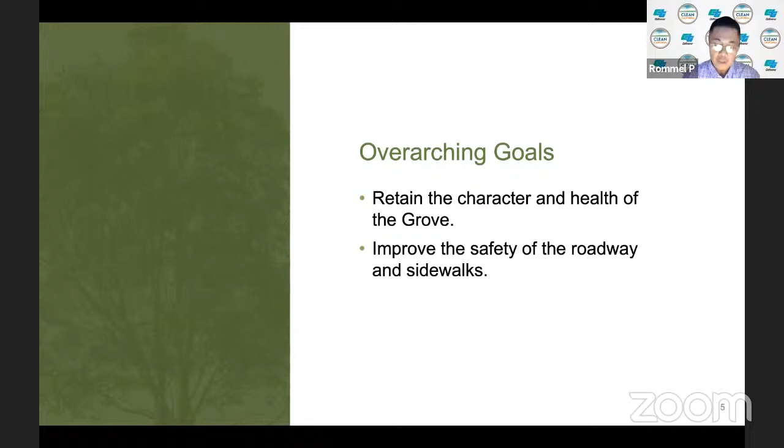Next slide. We've been working hard to achieve solutions that meet your overarching goals of retaining the character of El Camino and improving the safety of this important roadway and its sidewalks.

Next slide. This slide shows our 3-mile project area limits and a bulleted list of the main items we're working on to improve. I will now share a few details about each of the 5 scoping items. Next slide.

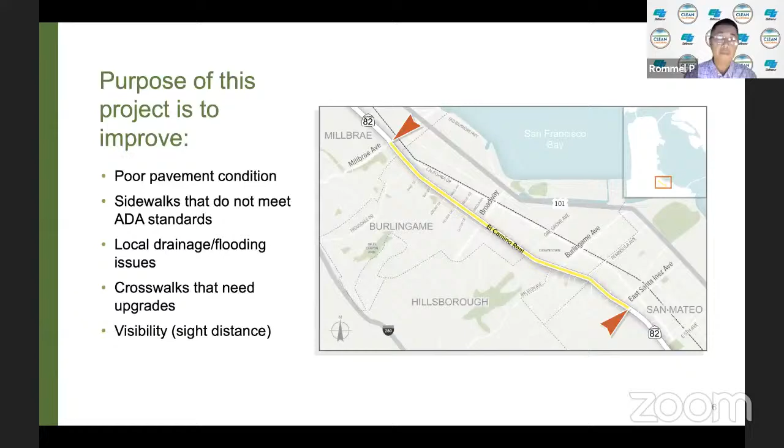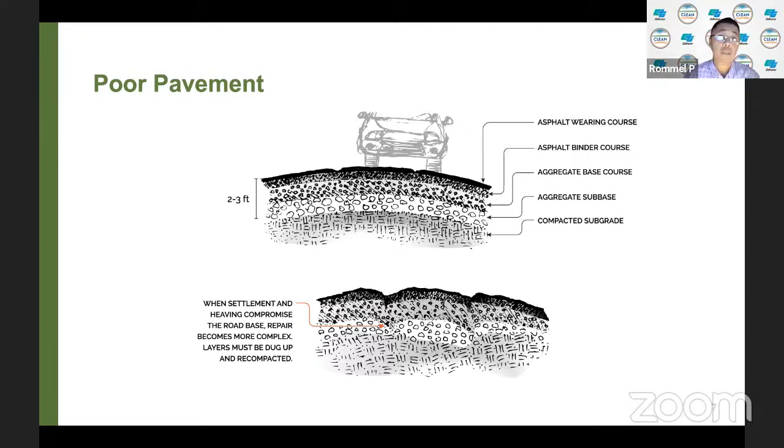El Camino Real has significant settlement, cracking and heaving of asphalt. The damage is so extensive that the road base has been compromised and surface patching is no longer an option, as you can see in this slide.

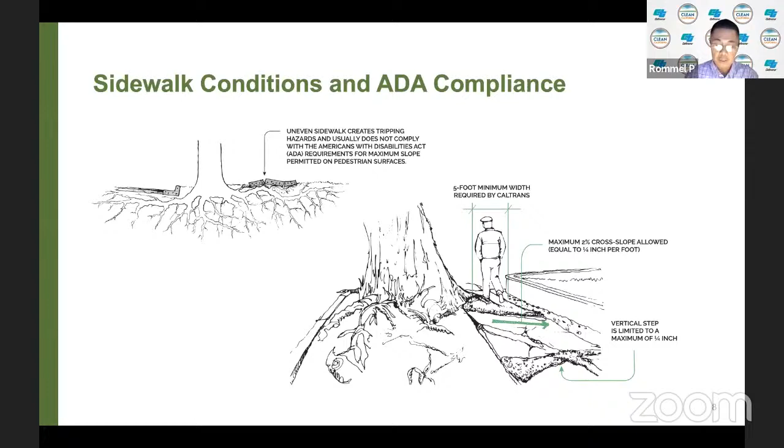There are several ADA issues present on the sidewalks: lack of appropriate widths, cracking of concrete that creates uneven surfaces, and cross-sloping issues. All of these will be addressed with this project.

Next slide. A new modern drainage system is also needed for ECR. There are several issues shown here that are a result of old drainage infrastructure.

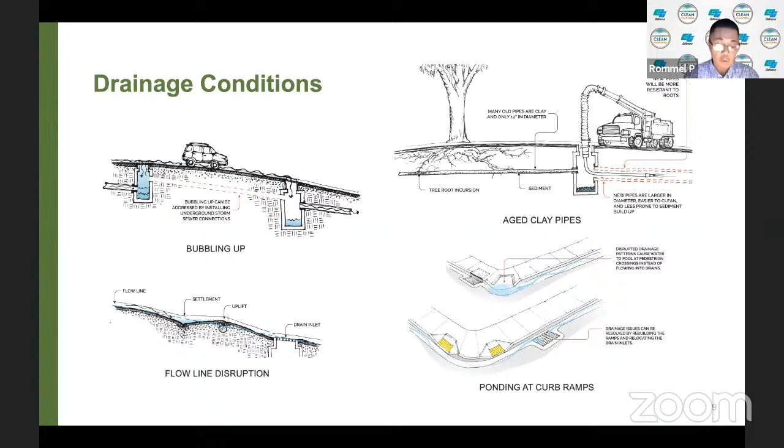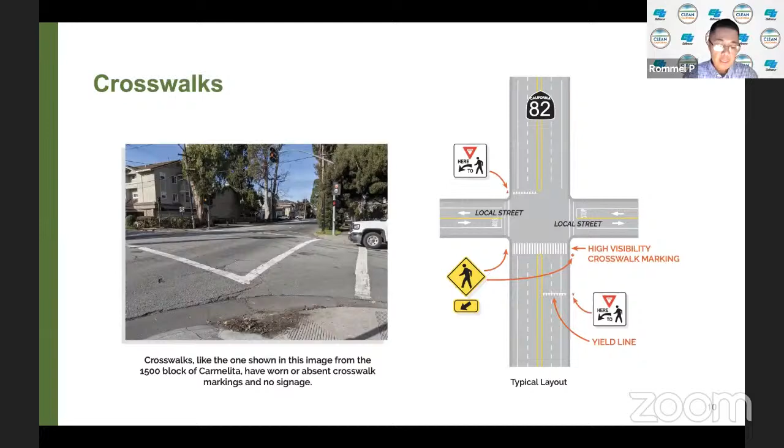Next slide. A total of 16 intersections in the project area need pedestrian crossing improvements. We'll place highly visible pavement markings and install proper yield signs at these intersections.

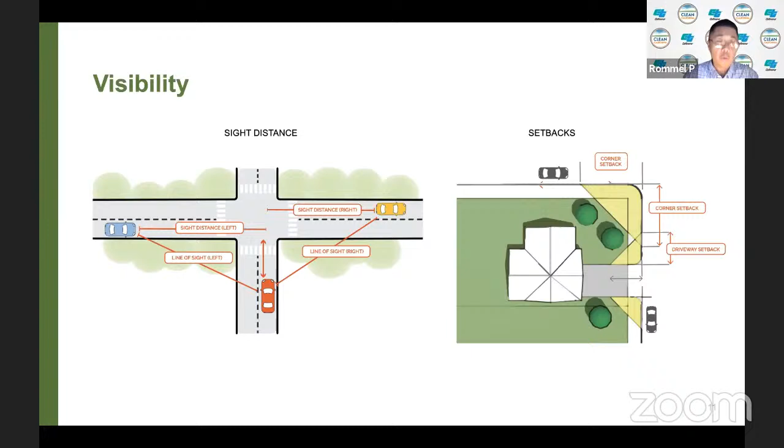Thank you, Rommel. Once again, my name is Marc Wong, and I'm the Caltrans Design Senior on this project. As Rommel mentioned, we've been busy over the last several months putting our research on paper. All of our Caltrans departments are underway on design work, and that includes electrical, environmental engineering, corridor management, hydraulics, landscape architecture, materials, right-of-way, traffic signing, and utilities.

A few things to highlight. We've completed LiDAR mapping and photogrammetry of the project location, which, to those who are unfamiliar, is using sophisticated technology to accurately map the ground, as well as aerial photography to give us a pictorial representation of the roadway. Survey alignments have been generated. Tree locations and types have all been inventoried. Sidewalk and planter layout is underway, and coordination with PG&E is ongoing.

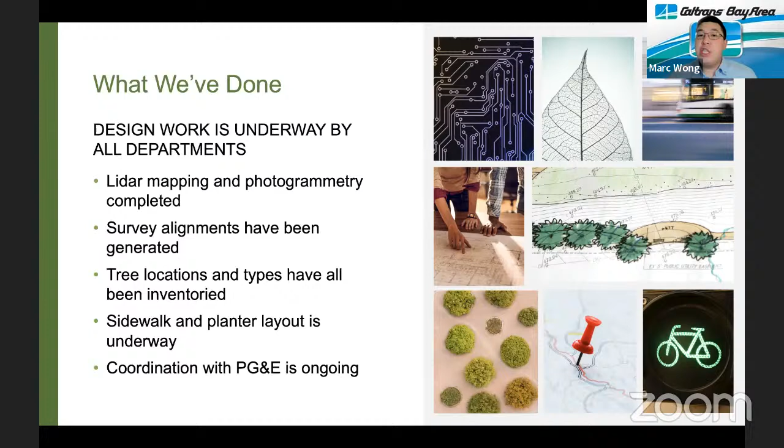By this April, we plan to complete our 65% design package, which will include the plans, project specifications, and the engineer's estimate, also known as PS&E. We'll determine sidewalks, crosswalks, and planter layout, identify trees to be removed, identify properties that will need temporary construction easements to rebuild driveways and retaining walls.

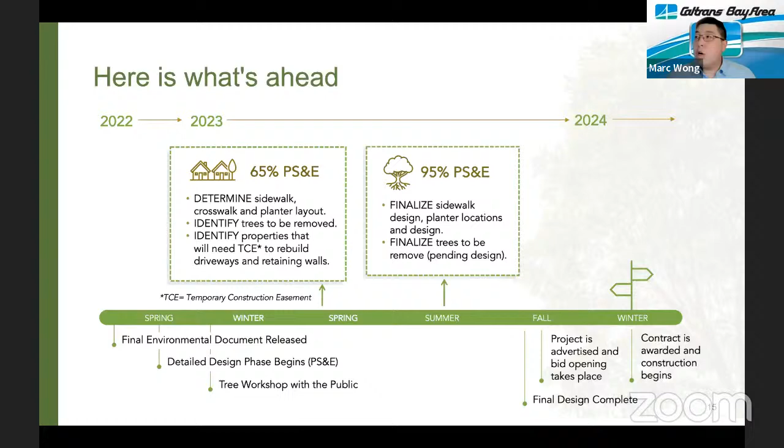And by next summer, we should have our 95% package complete. Our 95% package will finalize sidewalk design, planter design and locations, and finalize the trees to be removed. Following 95%, our completed design package is expected to be complete by early fall, followed by project advertisement shortly thereafter, and awarding the contract to a contractor in early 2024.

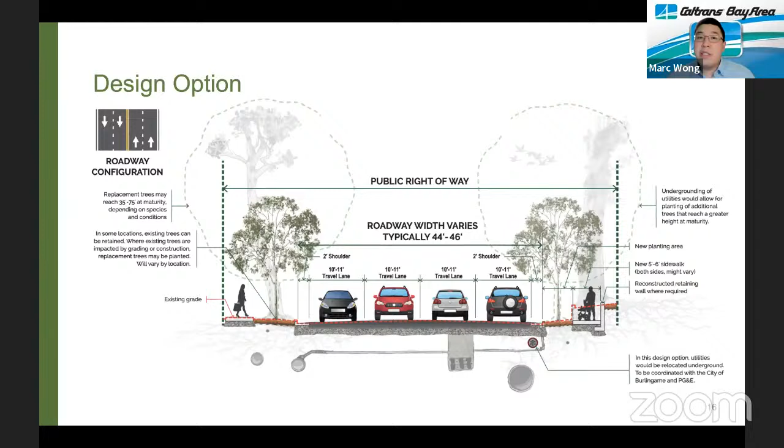And now I'd like to hand the presentation over to Kimberly White from our landscape design team to go through some visual simulations. Kimberly? Thanks, Marc. Good evening, everybody. I'm Kimberly White, the senior landscape architect for this project.

I'm going to first review the simulations we prepared for the visual impact assessment and environmental document. We selected 3 locations that represent both the variability of the project corridor and the areas where we anticipate more substantial impacts. These locations included Hillside Drive, Forest View Avenue, and Carol Avenue.

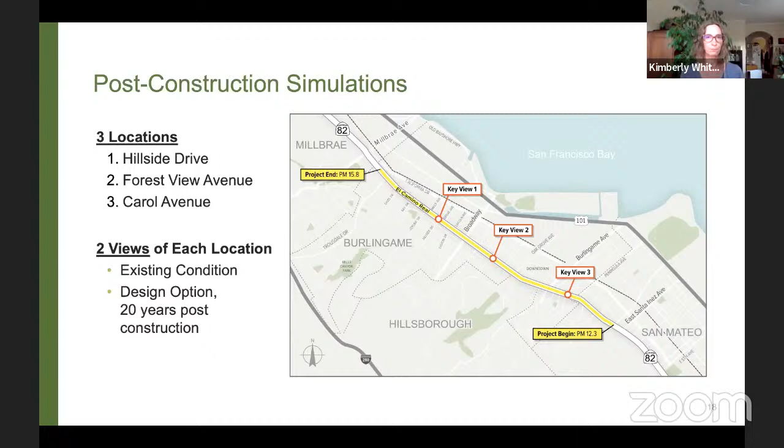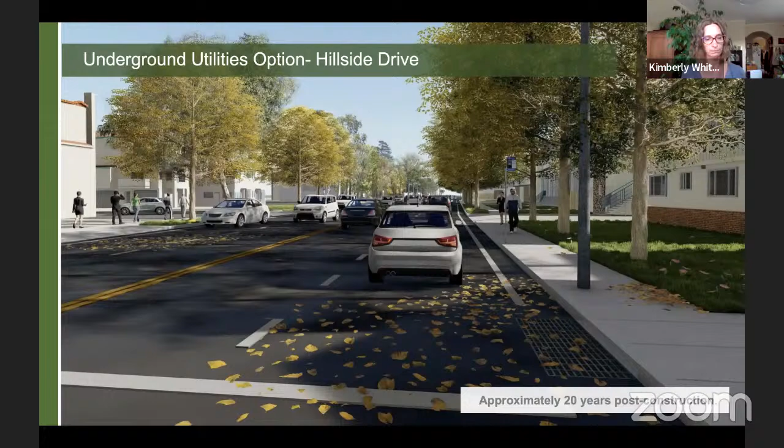So if we look closer down the block, you see the sidewalk is shifted with the trees and planter strip between the pedestrians and street. I will explain more about the reasons for jogging the sidewalk later, but briefly, this is an approach we are carrying forward to maximize the number of street trees we can plant while preserving clear visibility and safety for all users on El Camino at the intersections.

Maximizing tree canopy, ensuring safety, and locating trees between sidewalks and street were all priorities identified by the community task force.

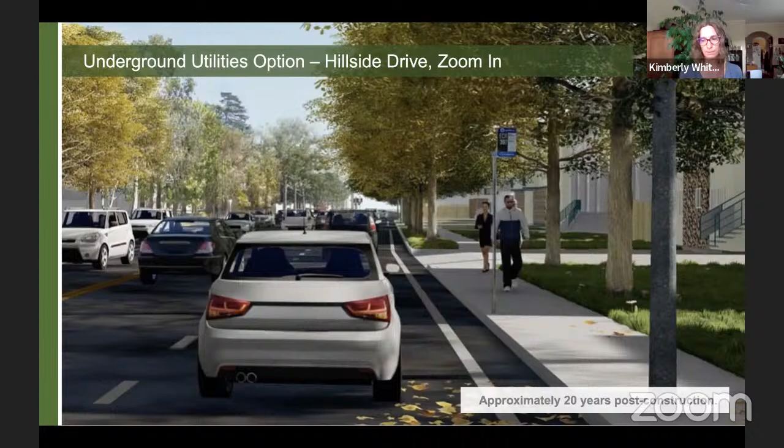Unfortunately, we discovered with input from our independent arborist, HortScience, that many of these trees have compromised health and structure. The large tree trunks and roots have also impacted the retaining walls on both sides of the road, and these will need to be replaced as a result. The damage to the tree's roots for this work would destabilize them, and we are expecting they will need to be removed.

With the tree removal and rebuilt retaining walls, we do end up with the opportunity to relocate the planter strip and trees between the sidewalk and street.

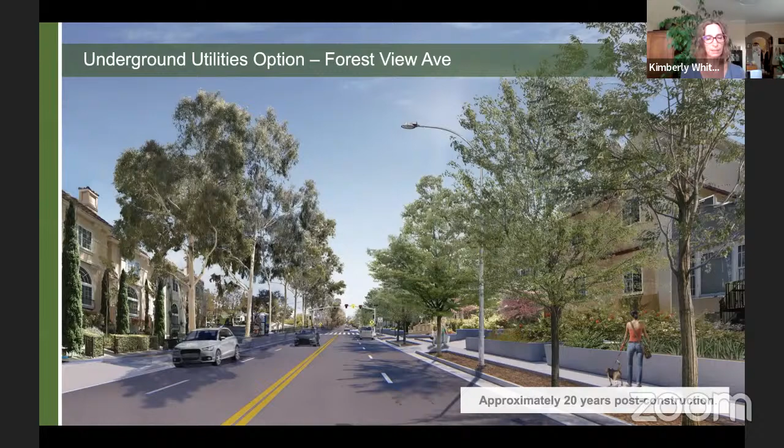Here again, we are looking at the project about 20 years post-construction. We've shown eucalyptus on one side and elms on the other just to depict what the two main trees would look like. However, we aren't necessarily proposing that we approach the tree planting in this way, and we look forward to getting some further input on tree planting design at our tree workshop early next year.

The last location is at the intersection where Carol Avenue, Cypress Avenue, Bayswater Avenue, and Primrose all come together at El Camino Real. We are closest to Carol looking southbound, and you'll see that there's a historic mid-century apartment building on the right.

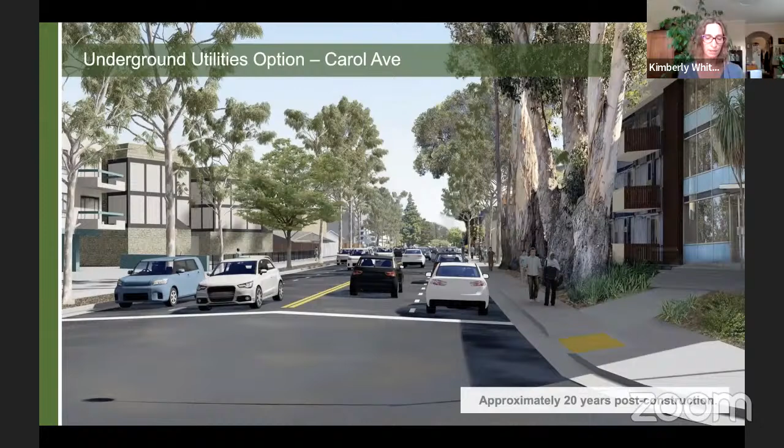This is a location where we believe we can retain some of the large eucalyptus. You'll see most of the trees on the right side are the older preserved trees. Most replacement trees shown in this simulation are eucalyptus, again, just to demonstrate the possibilities.

As I alluded to in the simulations with the jogged sidewalk configuration, sight distance is a primary concern for Caltrans in figuring out how many trees can be replaced. We are striving to implement this critical safety requirement while maximizing the tree canopy along El Camino Real.

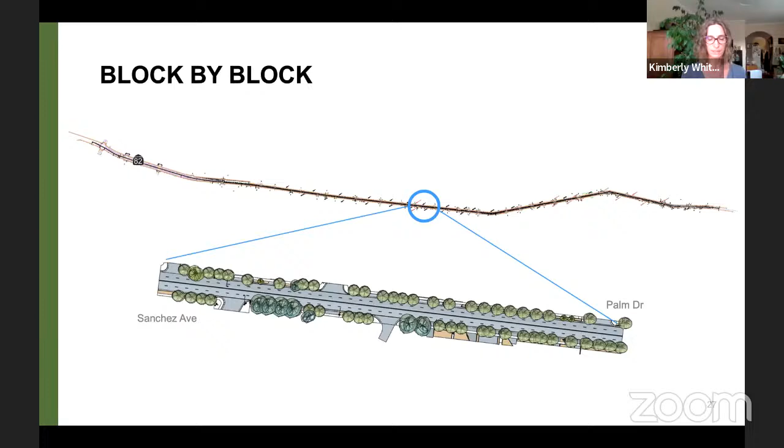Given the variability of El Camino, there is not a one-size-fits-all solution. We have to design this project block by block. This plan view from Sanchez Avenue to Palm Drive shows the two-block segment that made up the task force pilot study area. This area captures the variety of conditions along the corridor and demonstrates the project's challenges. We use this same segment to explore tree replanting and sight distance considerations using a 3D model.

First, let's take a quick look at what Caltrans means by sight distance. Essentially, sight distance is the distance within which a driver has a clear, unobstructed view of the road ahead while moving at the road's design speed. Not surprisingly, greater visibility has been shown to reduce accidents, and Caltrans has specific safety guidelines that dictate sight distances.

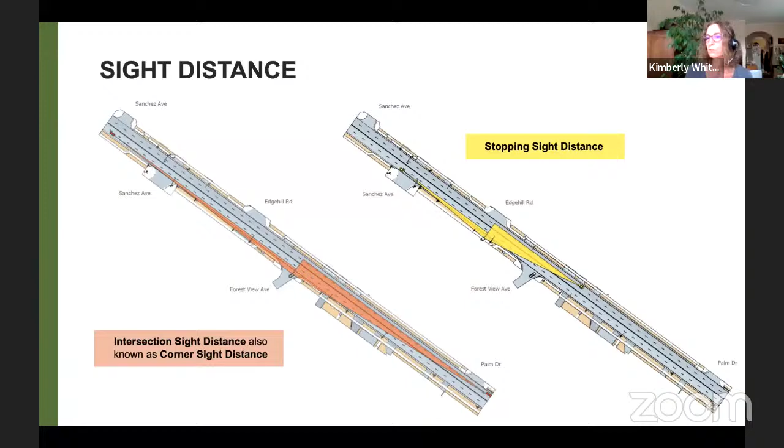Here we will look at two types of sight distance: stopping sight distance and intersection or corner sight distance. The yellow area shows the sight triangles required for stopping distance, and the orange triangles show the intersection or corner sight distance.

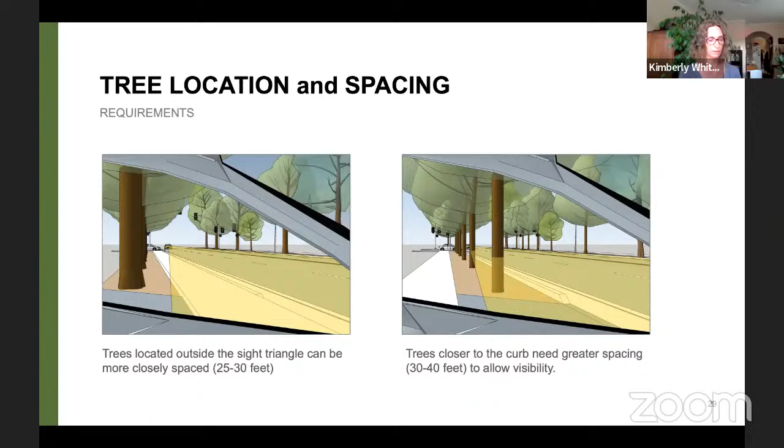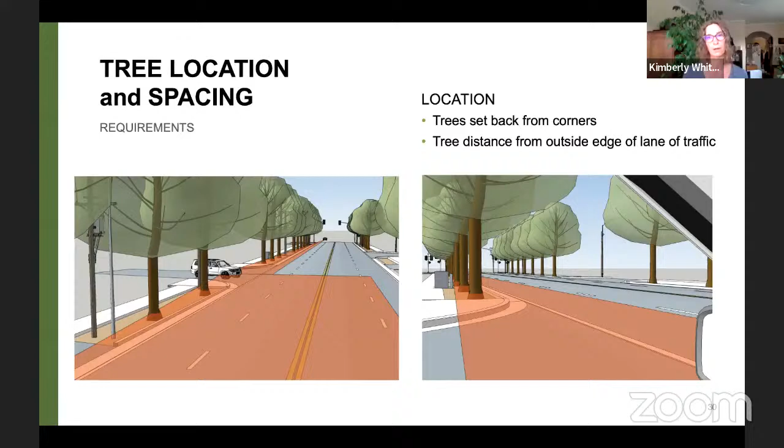This observation is what led us to the solution to meander or jog sidewalks. Near corners, we can keep the trees set back where visibility is crucial. Beyond the corners, we can then move the sidewalk away from the street. This approach allows us to plant the most trees along El Camino without impeding sight distances.

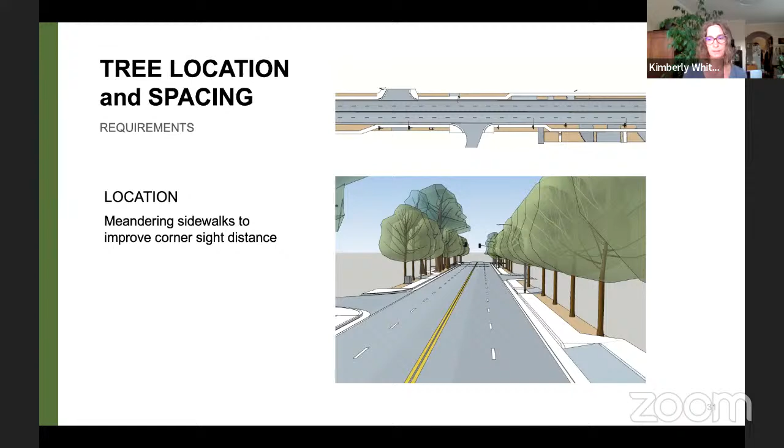Does this mean we have to plant all trees with small trunks? No, but it does mean that the mature size of trees needs to be kept in mind as we figure out what tree species go where and at what spacing. I hope this closer look at sight distance and trees was helpful. Next, Frances Schirnbeck is now going to provide an update on cultural resources.

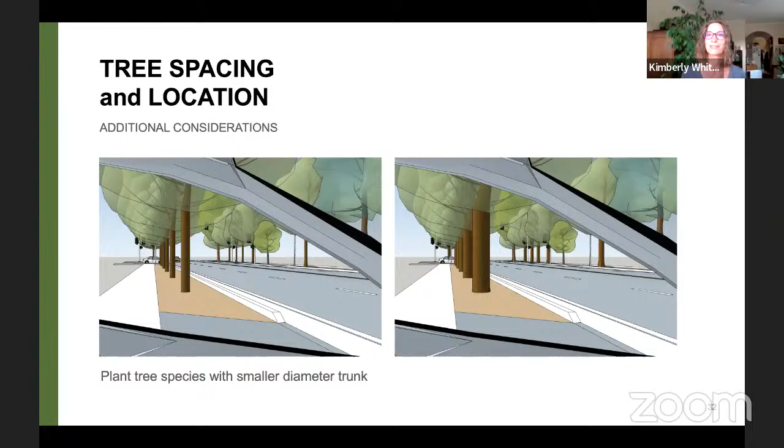Thank you, Kimberly. Yes, my name is Frances Schirnbeck. I'm a senior environmental planner in the Office of Cultural Resource Studies. And this is Hemi, she's meowing in my lap.

I'm an architectural historian. As you know from the environmental document, we will be having an adverse effect to the Howard Ralston eucalyptus tree rows and to 3 other properties. The tree rows are listed on the National Register of Historic Places, and the 3 other properties are eligible for the National Register. Because we are having an adverse effect, we have a memorandum of agreement, or MOA, with the State Historic Preservation Office, which is for the resolution of the effects to the resources.

We have been working closely with the Burlingame Historical Society throughout this process, and we will continue to do so. One of the goals of this project is to try to keep these trees listed on the National Register. So in addition to replanting of the trees, we will be having a public tree workshop. There are parameters about which trees we can plant because it is a National Register listed property, but Kimberly will go into this a little bit later on.

We will have environmentally sensitive areas, which are ESAs, and those are for areas where there are historic elements that we don't want to be damaged by any construction activities, so we will fence them off.

We will also be doing the Historic American Landscape Surveys, or HALS, for the tree rows, and the Historic American Building Survey, or HABS, for the other properties. That is a very thorough documentation of the resources, done through the National Park Service, and they go to Washington, D.C. to be put on in their files.

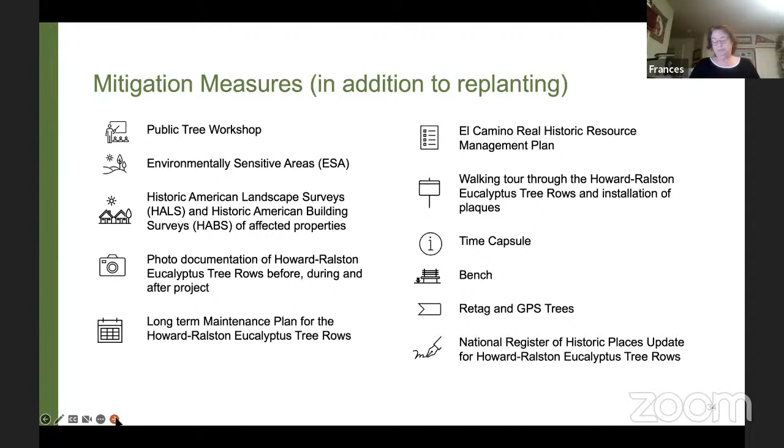So we are planning this tree workshop that we've mentioned multiple times this evening for early next year. I'm hoping that you all can join us for that. Hopefully it will be in person at the Burlingame Recreation Center. The workshop is meant to engage the community in a more detailed and design-oriented discussion of the tree rows and replacement trees.

We'll review some topics we've presented at previous public meetings, such as the historic aspect of the tree rows and their current health and condition. We will then delve into the specific factors and design considerations that will inform what trees go where and how we can ensure they are successful. This will include information on street tree functions, safety, types of replacement trees, and sustainability.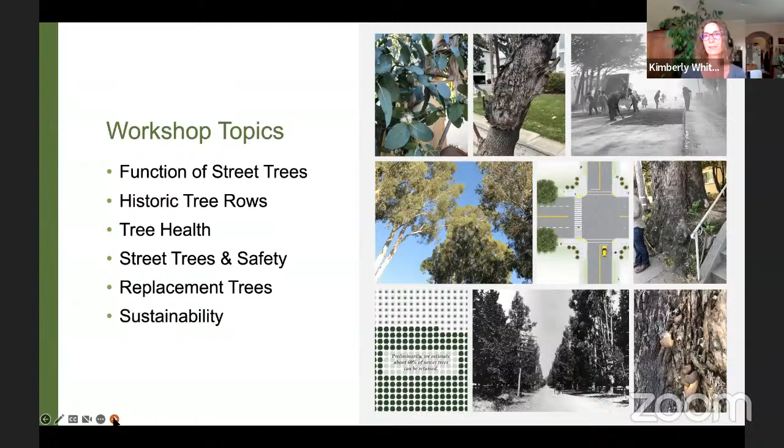I look forward to getting more input from everyone as we develop our plans for this project. I want to thank everyone who has taken the time out of their busy schedules to join us here tonight, and we are happy to take any questions at this point.

Thank you. Really appreciate the presentation. I think that for us in Burlingame, this is a very important project. Our El Camino is very unique, and we hope to keep the character. And I just want to say thank you to my colleagues, Michael Brownrigg and Emily Beach, for participating in the subcommittee.

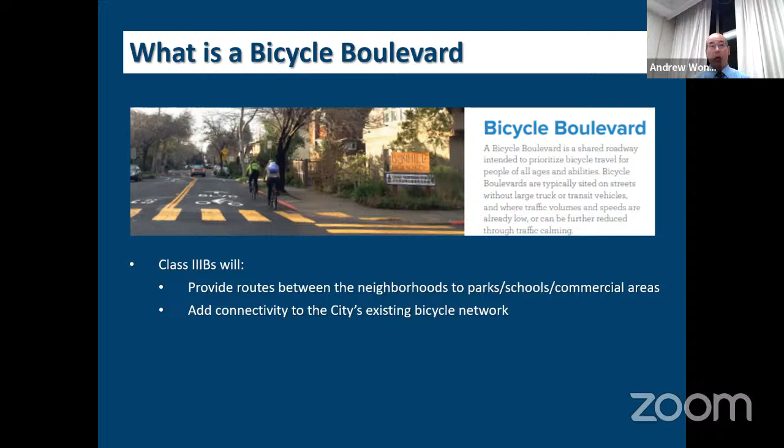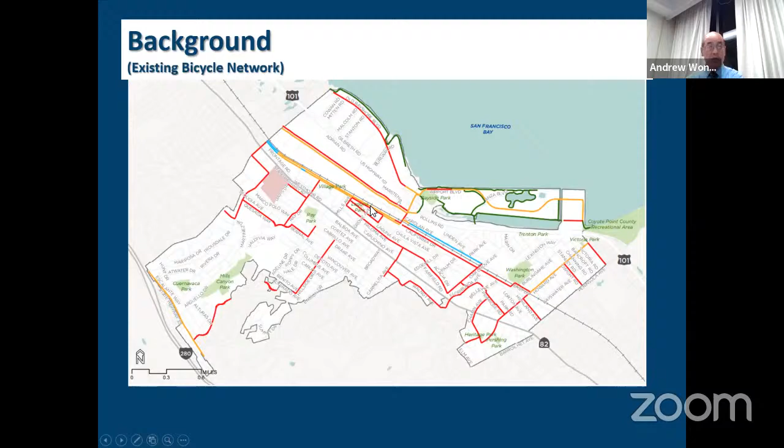So looking at the network, this is the existing bicycle network we have right now. As you can see, we've got a lot of north-south roadways, but not a lot of connectivity east-west. If you look at it specifically, like the Lyon Hoag area and the center of town here, it's kind of bare. So if you look at the next slide, it'll show these are the class 3B facilities.

As determined in our 2020 bicycle pedestrian plan, you can see Lyon Hoag's filled up, and definitely the center of town has a lot of facilities. In yellow, we're looking at the roadways: Paloma, Capuchino, Mills, Grove, and Carmelita.

On your presentation, just a note, something moved, so the map actually shows a little offset. This presentation shows where the roadways go.

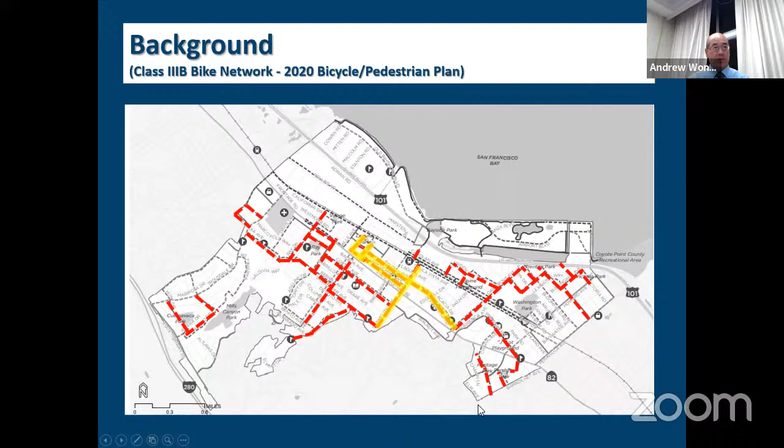How we got here, timeline. This was all started with the adoption of the 2020 Bicycle Pedestrian Master Plan. That provided the framework and vision for the bicycle and pedestrian infrastructure moving forward. That plan provided locations and priorities for our class 3B facilities.

Ranked high there was the Carmelita Paloma neighborhood bike routes, and that included Carmelita, Paloma, Capuchino, Mills, Grove, and it's one of the higher priorities in that document. It will provide not only alternate north-south routes, but will connect the residential neighborhoods and downtown.

Staff have previously presented this to the Traffic Safety and Parking Commission in February and May of this year. In addition, staff was able to obtain additional feedback from the community BPAC on Bike to Work Day. Following all that feedback, staff in July presented a revised approach and concepts to the community. At that meeting, both the Traffic Safety Parking Commission as well as the community BPAC supported the revised concepts and approach. And that brings us to tonight.

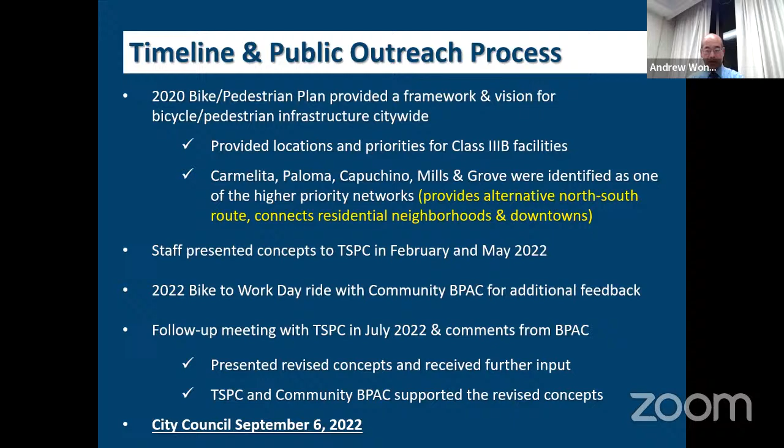So jumping into some of the things that we previously looked at back in February and May, we looked at bicycle slots. Going back a little bit, previously when the council adopted the bicycle and pedestrian master plan, some comments were made. They wanted stuff aspirational, something that really belonged to our community.

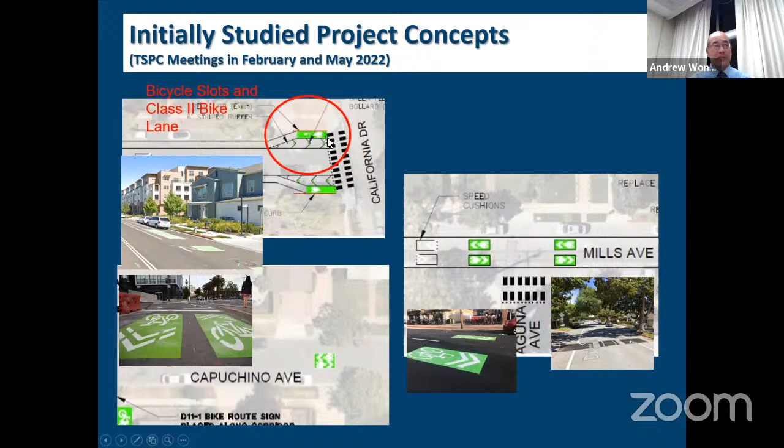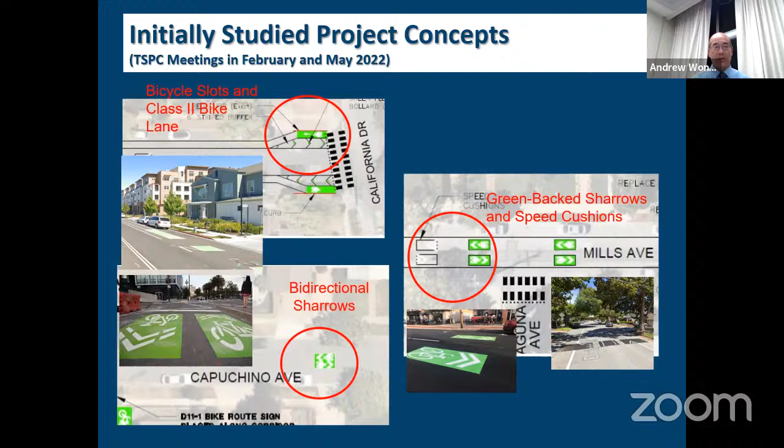So we took that to heart when we made some of these initial concepts. As you look, we have the bicycle slots here, and where we could, we tried to introduce class 2 bike facilities. Even though we were still looking at class 3B, we thought maybe we could push the envelope a little bit. So we looked at those, green-backed sharrows, as well as speed cushions. And then lastly, on some of our narrower streets, bi-directional sharrows—just sharrows a little closer together, but indicating two-way travel on our streets.

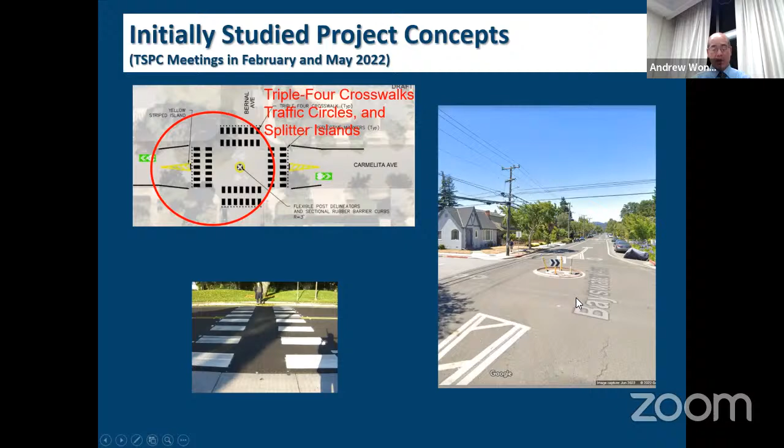We also looked at traffic circles and splitter islands that you see, and this is in the Lyon Hoag neighborhood. But those are some of the things we looked at trying to incorporate.

Some of the public feedback we got was that these improvements should be considered quick build, and quick build projects are done mostly with signing and striping. There were some concerns with the triple-four crosswalks—they've got reflective pavement markers, the reflectors in the ground, and that adds a little vertical to it.

So there were some concerns about running those over maybe at night. We had a lot of support from the neighborhoods for speed cushions, and specifically one street, and we'll go on later and talk about that.

There were concerns from the bicycle community at the intersections. They wanted to have the vehicles slow down as they approach the intersections just to improve the safety there. And we have some ways of looking at that.

Some of the things we try to do is introduce some new facilities by maybe altering or introducing parking restrictions that would allow us to put another bicycle or an enhanced bicycle facility on there. The community wanted to try to maintain that on-street parking and not include any new restrictions.

There were some concerns regarding, we had looked at some striped bulb outs, some of the stuff that you've seen in the Lyon Hoag area, as well as the traffic circles. But there was also some concerns there regarding accessing the other streets, the turns around some of those, as well as maybe vehicles and bicycles simultaneously going around the circle and cars maybe veering into paths of bicycles, some of that concern.

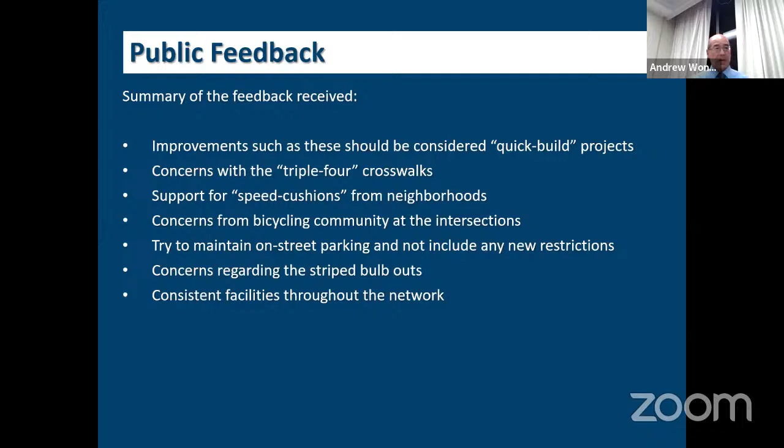Lastly, they talked about consistent facilities through the network. On some locations, say Paloma, Capuchino, where we had one-way sections, we actually had the width to introduce a class 2 bike facility. But some of the thoughts there were the concerns with having consistent facilities from block to block to block. So hence we're staying with some class 3B facilities there.

So based on the feedback we received, we returned in July with revised concepts, as well as a phased approach for the implementation of the bike boulevards. The initial phase and a secondary phase, and I put if necessary on that, and we'll talk about that.

The initial phase would be install green-backed sharrows. This will generally be 4 per block and 2 on each side of the streets. So for example, one-way streets would only have 2.

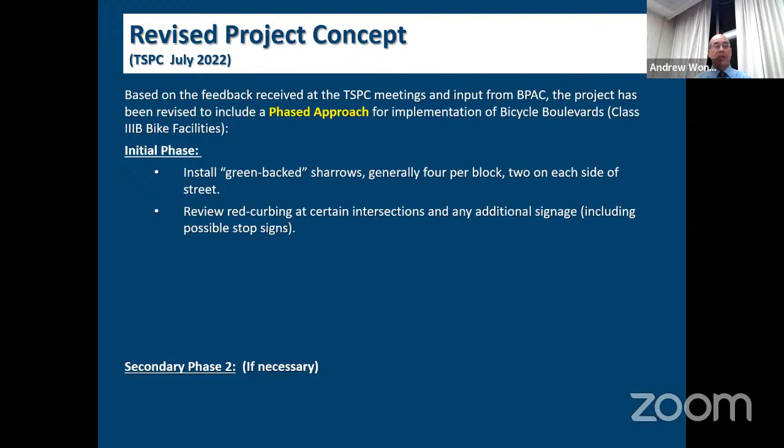Staff would review red curbing at certain intersections as well, and any additional signage that includes advanced warning signs as well as potentially stop signs. And we'll talk about that at one location.

And we're going to jump this one a little bit, but because of the feedback we received regarding speed cushions on Carmelita, we're going to move ahead with that on this initial phase. And we'll talk about what I mean by that when we get to secondary.

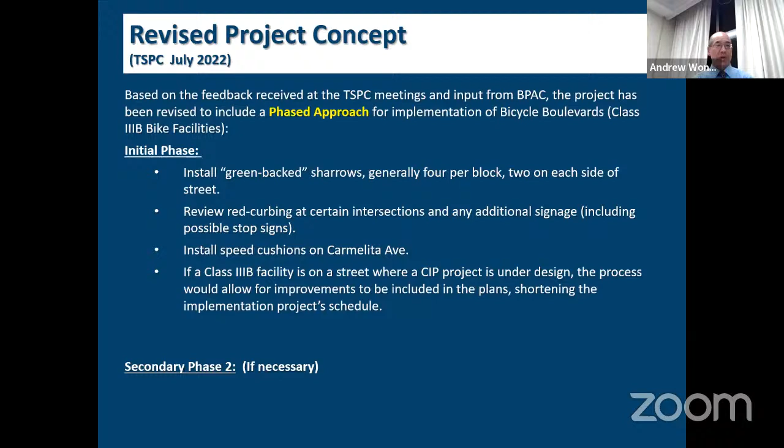If a class 3B facility is on a street where a CIP project is under design, the process would allow for improvements to be included on the plans, shortening the implementation project schedule. This just means any class 3B facility that's currently in the bike ped master plan, our capital improvements group will take a look at those streets that they're working on, see if there's one on there. And so they'll go ahead and put the bicycle boulevards on those streets, go ahead and show those improvements.

And lastly, before reviewing the before and after traffic data, we'll be using the streetlight data to do that. We're recommending a monitoring period of at least a year before considering phase 2.

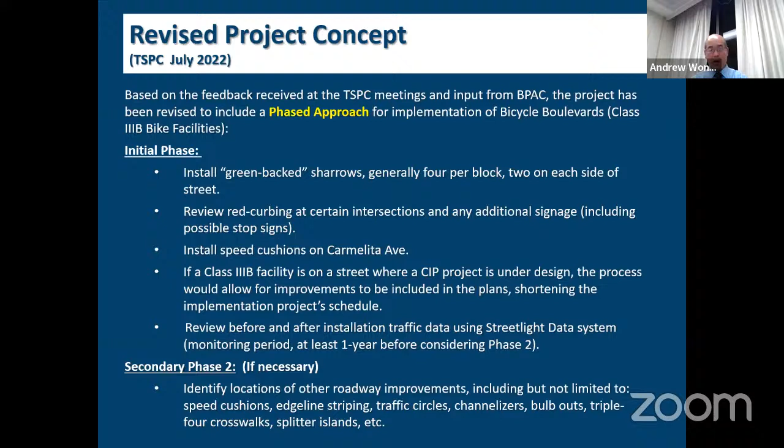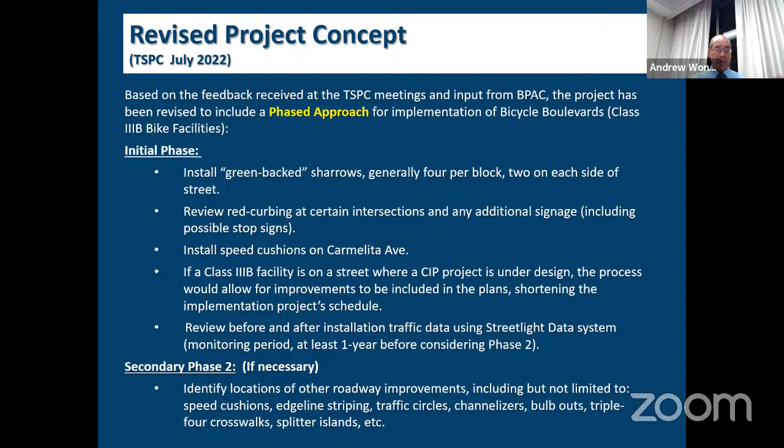So we look at the secondary, or phase 2. These identify the other roadway improvements. If we don't get the desired traffic speed reductions, we'll look at installing what we had previously talked about: the speed cushions, the traffic circles, channelizers, bulb outs, triple-four crosswalks, and splitter islands. So we're not introducing them initially, but we're keeping them in the program, so if we don't achieve those speeds.

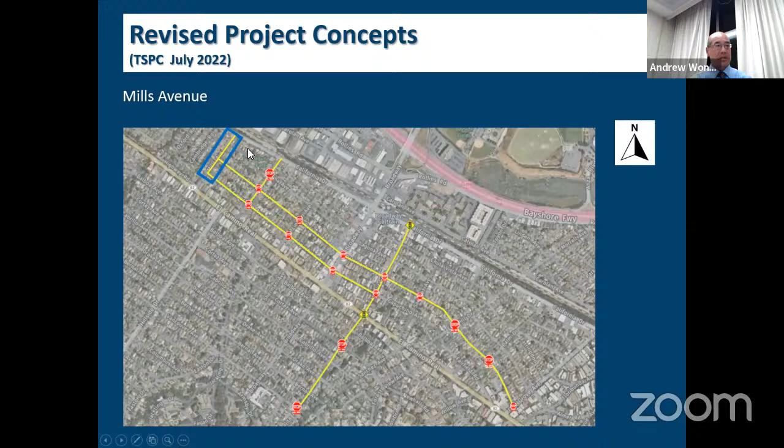So let's talk about Mills. Let's look at the entire network. These are the streets we're looking at here, Mills between California and Capuchino. We're simply putting in green-backed sharrows. Again, a pair here, and there's a pair at the next intersection at Laguna.

Where we can, at certain intersections, we'll go ahead and improve the crosswalks. And at this location at California Mills, we're going to go ahead and introduce, there's not currently a crosswalk there, but we'll put a high visibility crosswalk.

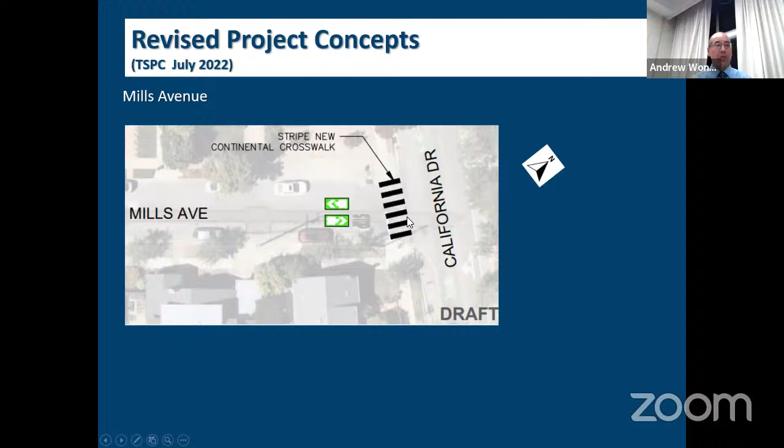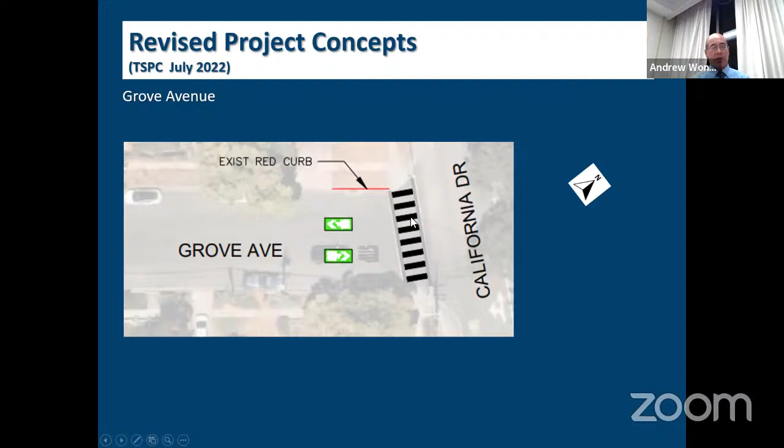Moving on to Grove, similar, green-backed sharrows, and we're going to enhance the existing crosswalk with high visibility treatment. Then moving on to Capuchino.

Capuchino, we start getting a little different here. The road narrows up, so we're going to go ahead and introduce the bi-directional sharrows here. Looking here, we're also going to enhance the high visibility crosswalk, as well as look at red curbing to enhance the visibility of bikes and peds from drivers.

Next, Capuchino, the one-way section, we're going to go with, again, the green-backed sharrows, but just a couple along that block.

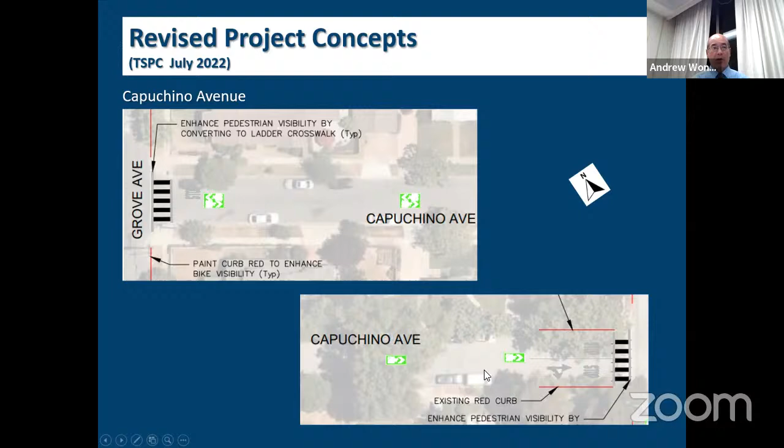Paloma is also going to match, kind of mirror image, Capuchino. Where it narrows up, we're going to have bi-directional sharrows, enhancing the crosswalks and introducing red curb.

What happens differently specifically at Paloma Carmelita, we're recommending an all-way stop. Currently it's stopped on Paloma. We're going to install stop signs along Carmelita. These stop signs not only provide stopping there, but they're also going to introduce traffic gaps along the Carmelita corridor. The adjacent intersections, folks, bikes and peds will be able to have a gap where they'll now be able to enter Carmelita, where vehicles have slowed down and stopped at Paloma.

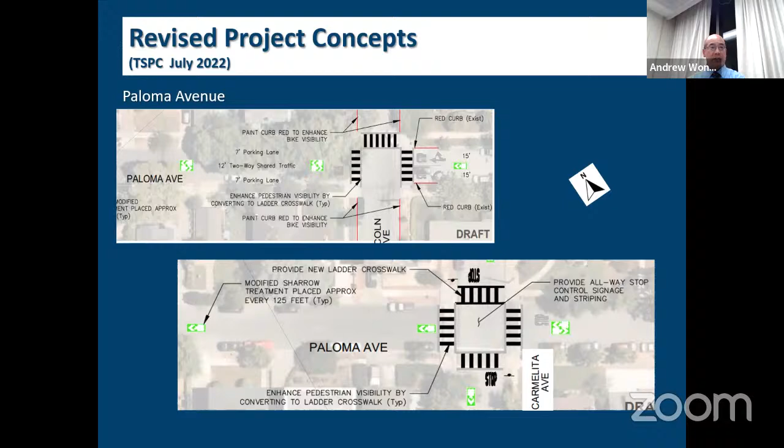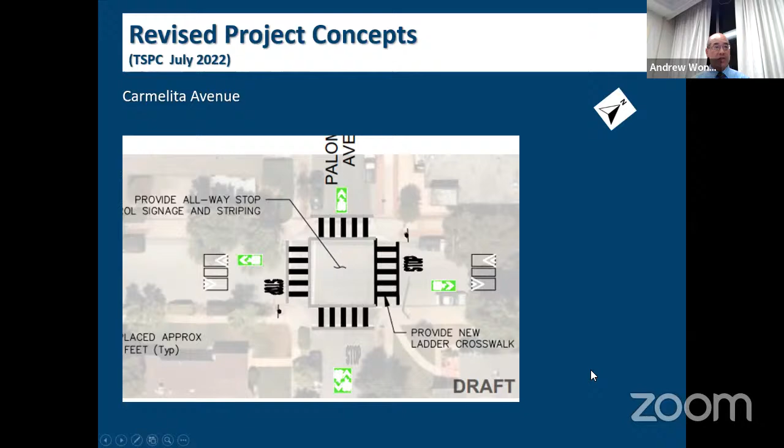Lastly, Carmelita. We talked about all-way stops, but along the corridor here, this is the one location where we're going to introduce speed cushions, rubberized speed cushions, the same ones we've approved with County Fire along the Lyon Hoag area. Again, these are going to provide gaps, and folks slowing down will address some of the BPAC's concerns at the intersections.

So let's go back and summarize. As a big part of the program, we will be installing the green-backed sharrows. We will review red curbing at intersections as well as any additional signage, and in this particular location, a stop sign at Carmelita and Paloma. We're going to advance speed cushions on Carmelita due to the feedback we received.

Again, if a class 3B facility is on a street where the capital improvement is under design, we're going to go ahead and put that in, helping the capital improvement side with their project scheduling. Lastly, we're going to review all the before and after data using our streetlight data system.

Secondary phase, if necessary, if we don't see a speed reduction, we're going to go ahead and introduce additional speed cushions, traffic circles, and we'll design those, and those will go forth to the Traffic Safety Parking Commission when we move forward with that.

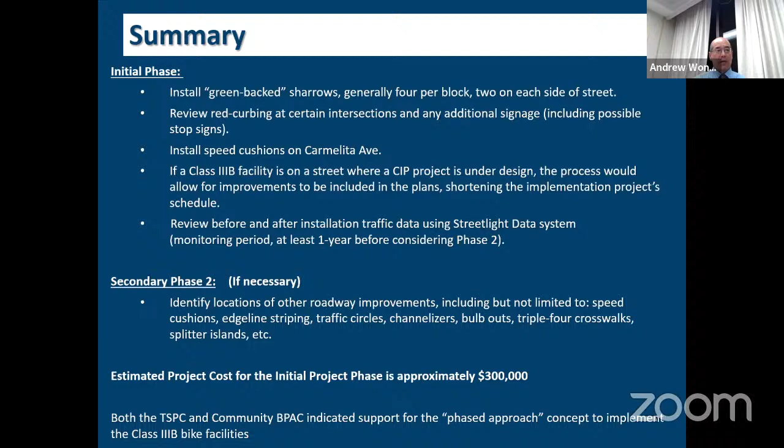The estimated construction cost for this phase is approximately $300,000. And like I previously said, both the Traffic Safety and community BPAC supported the phased approach concept to implement the Class 3B facilities.

Again, what we're seeking tonight is feedback from the council, and we will take that feedback back to revise and finalize the phased approach. Lastly, staff will pursue any grant opportunities to obtain funding for the project, and we'll explore other opportunities to incorporate improvements as part of other projects, feasible contingent upon funding availability. Just means if we have capital improvement projects, we're going to seek to incorporate the improvements there.

So with that, I thank you for your time. I apologize for the mess up earlier, but I look forward to taking your feedback.

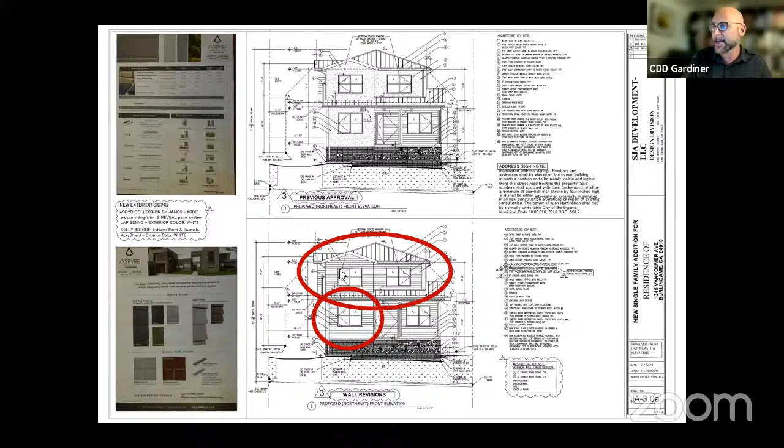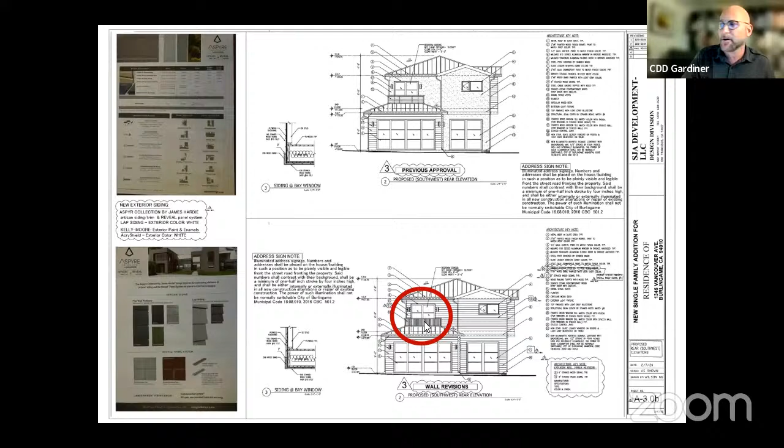Moving to the back elevation, there's a couple changes. The first is similar to the change from stucco in these parts of the house to siding. There's also a change in the railing. What was horizontal cable railing, metal cable railing, in the approved plans has been requested to be replaced with wooden railing with vertical elements.

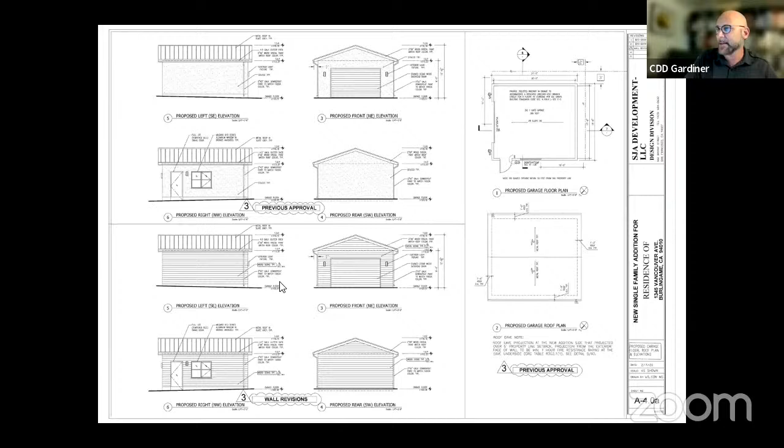Side elevations, similar. I won't put the circles on this one, but similar in request to replace the stucco surfaces with wood siding. Same with the other side, and same with the garage. Garage was approved with stucco, and the request is to have wood siding. So that's the extent of the changes that are being requested.

As mentioned in the staff report, the council actions can include denying the appeal and upholding the Planning Commission's denial of the application, in which case the original approval still stands. So that would be the rule if that was the action. The council could grant the appeal and approve the application or make modifications, or could remand the application to the Planning Commission for reconsideration.

And then as mentioned in the staff report, this is the fine print, but this is a de novo hearing. So issues may be considered by the council that were not necessarily reviewed by the Planning Commission. So the council is not obliged to continue what the Planning Commission had looked at, certainly could, but it's also a de novo hearing. So the application is being looked at on its own merits this evening.

I do see a hand, so we'll have a moment to ask questions, but I do want to also mention with us tonight is Milo Traus, who is serving as the representative for the project, as well as Jason Wong, who is the project sponsor. I believe the designer Wilson Ng was also going to be here. I don't know if I've seen his name in the list, but in any case, the applicants will have an opportunity to make a presentation during the public hearing, but before that, I am available for questions of staff.

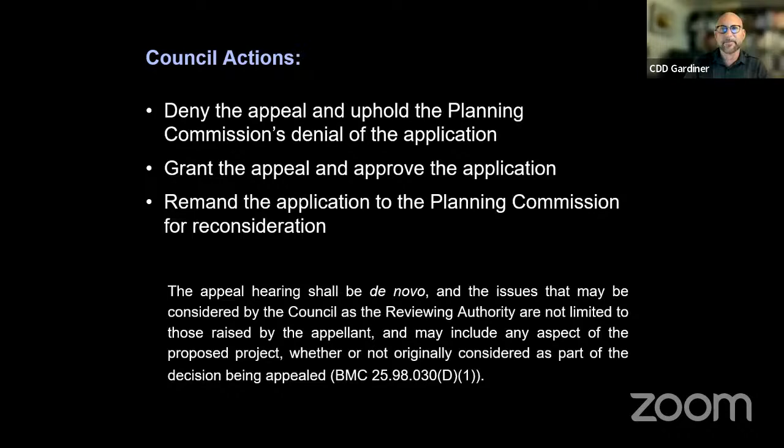Very good, so that's what we'll do, we'll have some questions first. Councilmember O'Brien, I just want to make sure I'm understanding this correctly. The issue is we want to go from stucco to wood siding, and the reason we're saying is because we were not able to get materials to do the stucco siding. Am I missing something? That is what the applicant has reported, yes, that they were not able to get the materials for the stucco siding.

Okay, thank you. Councilmember O'Brien, my question is, they're requesting these changes, but the changes have already been made, correct? Because I did a site visit, it's already done. That is correct. And I believe either the appeal letter or the applicant, when they address the council, may be able to provide a little more information on why the construction proceeded despite not having the prior approval. Okay, great, I just wanted to clarify that. Thank you, colleagues, any other questions?